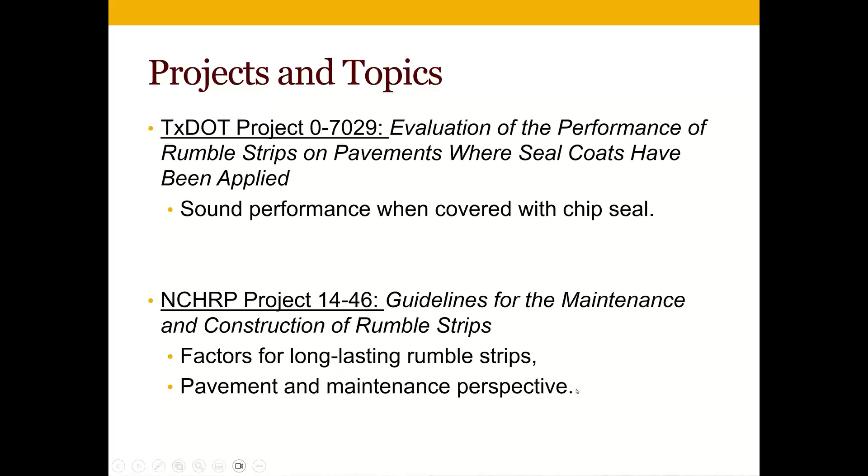I'm also wrapping up just now a project with NCHRP looking at guidelines for the maintenance and construction of rumble strips. In this case, we're looking at how different construction methods and maintenance affects the actual pavement condition where those rumble strips are, and how those rumble strips could be improved to improve durability. Because that project is still wrapping up, I'll only touch just briefly on it at the end here. So most of this will be about the TxDOT project.

So we defined sound performance of the rumble strip in terms of the change in noise when you're driving in the wheel path and then crossing over the rumble strip. In this case, the noise in the wheel path was about 64 decibels. When we went on the center line, that jumped up to 80. So the difference is a change of 16 decibels.

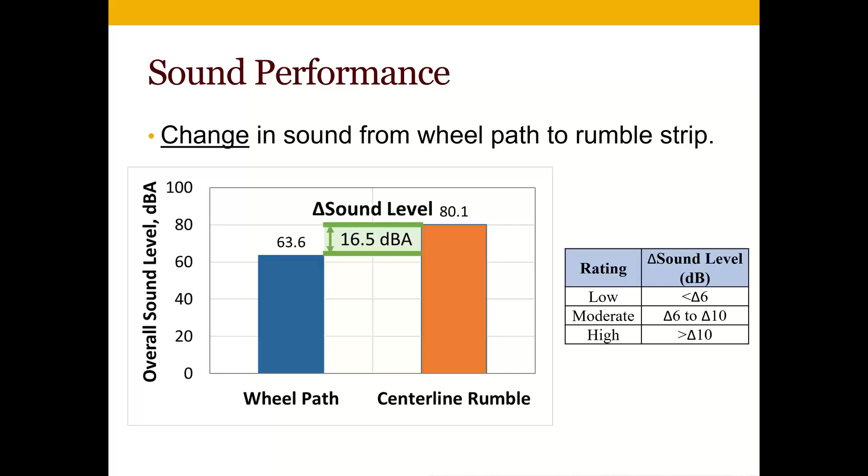When looking at some of the literature for this project, we considered a high-performing rumble strip as being greater than 10 decibel change, moderate being between 6 to 10, and low performance being below 6 decibel change. So the goal of the study was to really determine how many layers of a chip seal can you put down before you consider the rumble strip performance compromised.

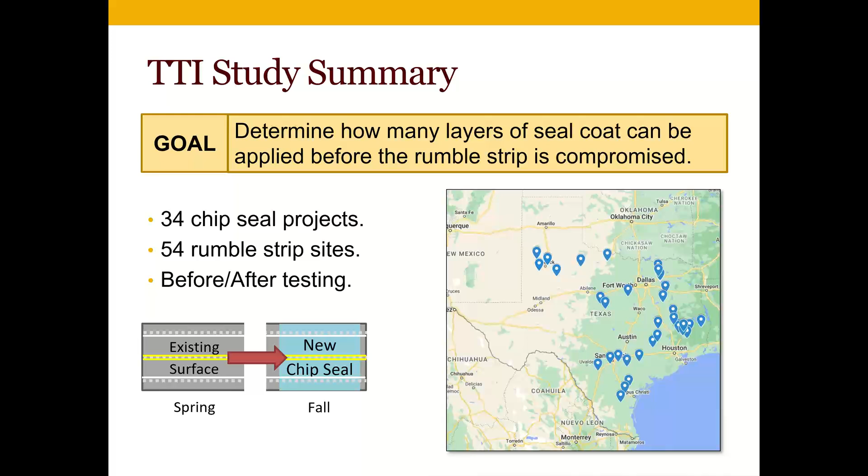So we had 34 chip seal projects around the state, a total of 54 rumble strips that we measured, and we looked at the sound and vibration before and after putting down the chip seal. Inside the vehicle, we had a microphone next to the headrest, and then we put accelerometers under the seat and on the steering wheel. We tested with a pickup truck and a passenger car going at different speeds. I'll just hit on the summary results here, focusing on the sound.

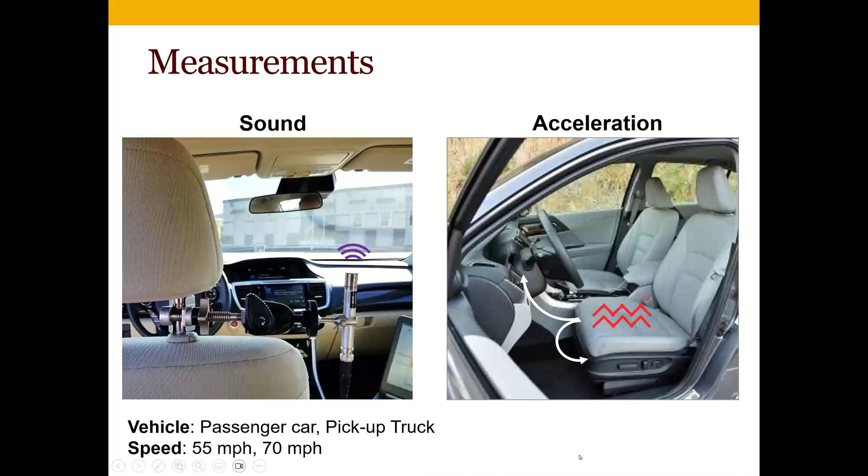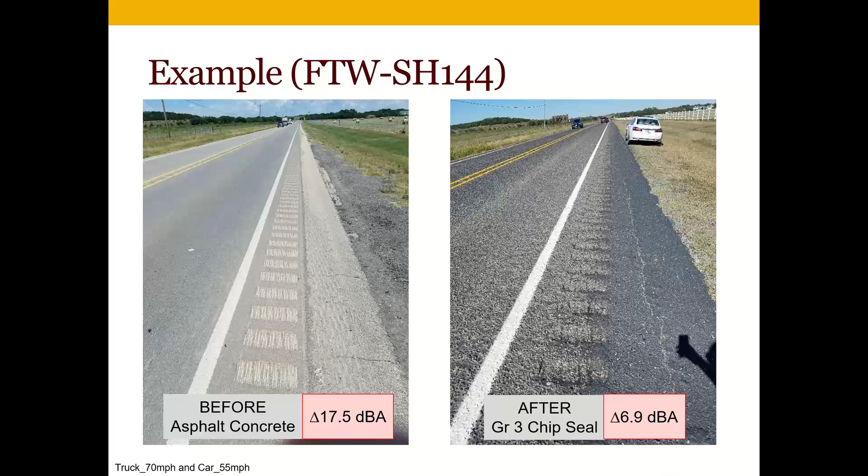So just some pictures here so you have an idea of what's going on. This is an asphalt concrete pavement beforehand, and it had a noise performance of 17 decibel change. After we put down what we call a grade 3 chip seal, that dropped down to 7 decibels. The grade refers to the size of the rock used, with grade 3 being 5/8 inch chip. Here's another example. This had already been covered once, and it had a performance of 6 decibels. You covered it again, and now it drops down to only 4 decibel performance, and basically you can't even see it.

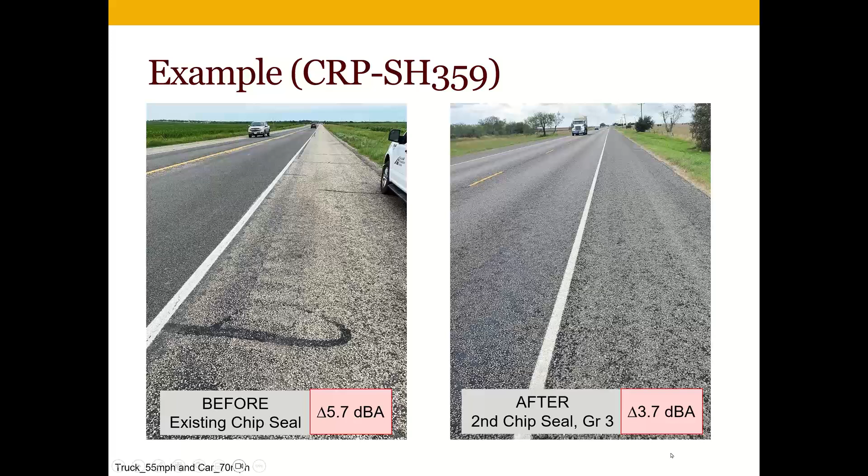So just a high-level view, we found that when it wasn't covered at all, on average we were about 14 decibels performance. That dropped to about 8 decibels after one seal coat or one chip seal, and after 2 and 3, they were basically the same at about 5 decibels. Now, this is the trend overall, but I put this long bar here that has a very wide range. This is actually the range of data that we saw within all the projects that we tested. In some cases, you had a rumble strip that was newly installed, but was almost on the verge of not performing well enough, whereas some of these, even after two chip seals, were still performing pretty well.

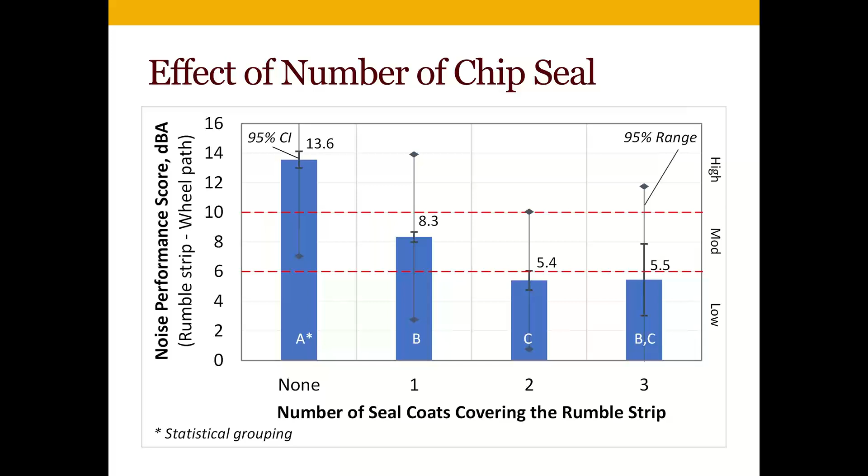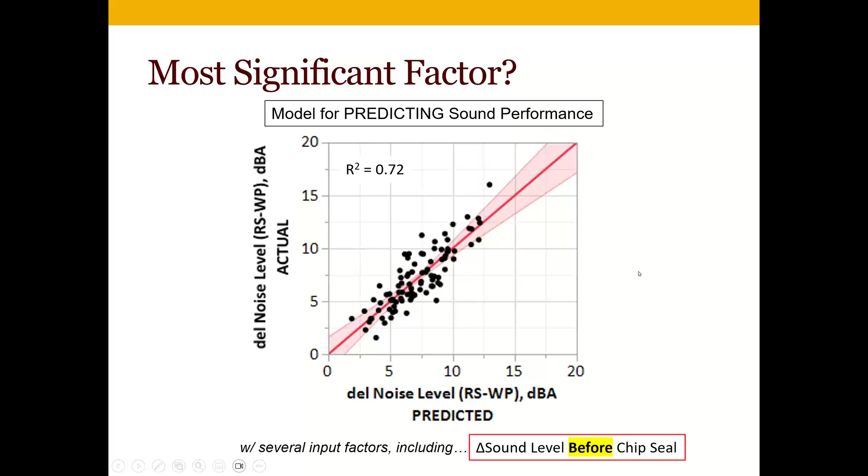But we looked at some other models, assuming you can't get the sound beforehand. So we have 3 models. The first, again, you measure the sound and you also measure the rumble strip depth. You have a pretty good prediction. If you don't have the sound and all you know is the rumble strip depth, you have a moderate accuracy prediction, about 0.5. And if you don't know anything about your rumble strip, you just know that it's there and that you're going to put a chip seal on top of it, you really don't have a lot of accuracy to know what the result will be. R squared is 0.3.

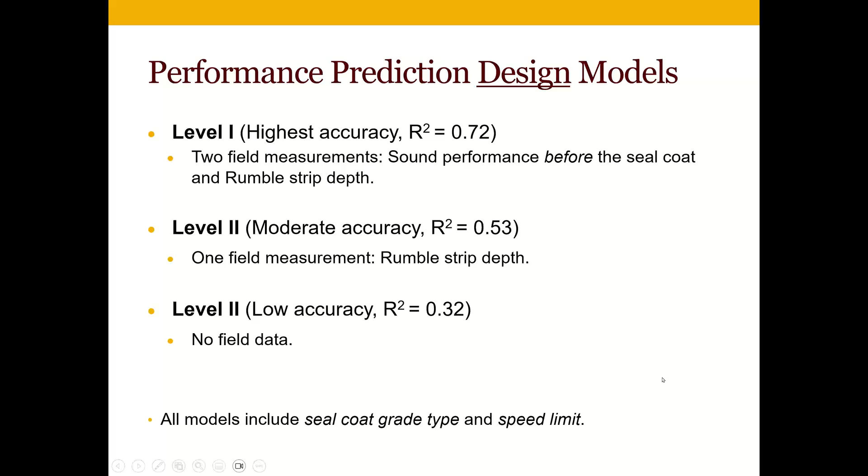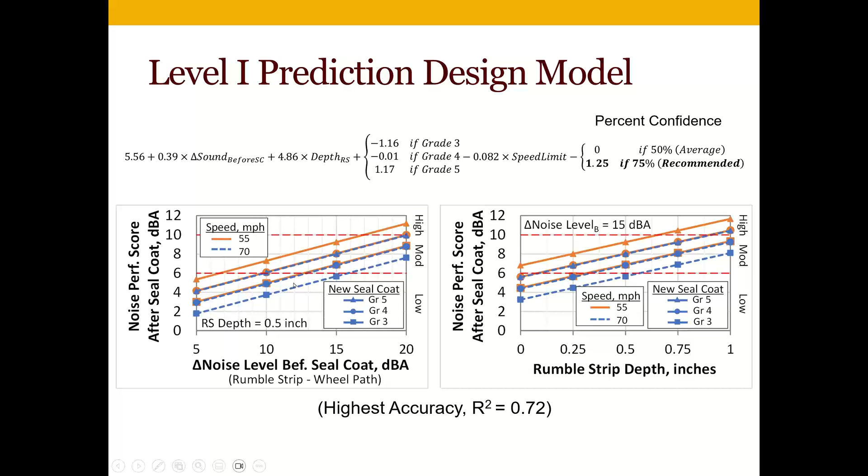But we did make these models, and so depending on what information they have, somebody could run this little equation here, or they could look at these graphs and predict, if I'm going in with 10 decibels, what do I think I'll get afterwards if I put down a grade 4 chip seal, for example. But the high-level takeaways, these are just rules of thumb that we can extract from these models. The first is, it's okay to use a chip seal over an uncovered rumble strip if you're using what we call a grade 4 or a grade 5. So that's a half-inch chip or less. If that's what you're putting down, you can put down 1 chip seal and you should be fine.

If you're putting down a larger chip size, then you've got to do a little more digging to see if your rumble strip is compromised. Also, if you have really good sound performance beforehand, greater than 15 decibels, and you have a typical rumble strip that's a half-inch deep, you should be fine. You can seal it.

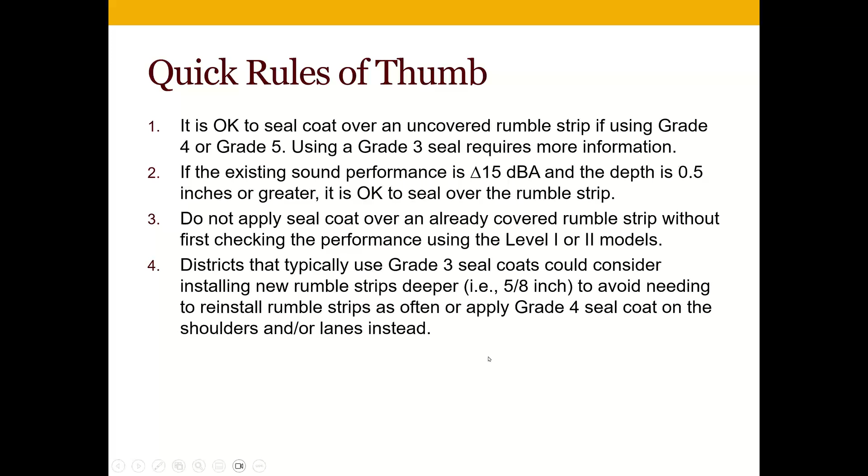We found that if you want to put down a second chip seal and you don't know anything else about it, like the depth of the rumble strip, there's a good chance that you're not going to get the performance you want. You really need a bit of information like the depth or the sound before you put on that second chip seal. We also found that if you're a district in Texas that uses that larger chip seal size, consider installing your rumble strip deeper to avoid needing to reinstall the rumble strip later, or apply a smaller chip seal, a smaller rock size.

I just wanted to touch real briefly on the NCHRP project we're doing that actually finishes this month, so the publication should be coming out soon. This included a survey of 30 states. We did interviews with the industry. Then we went and measured the distress of 110 rumble strips spread across 12 states, looking at pavement type, location of the rumble strips, on the joint, off the joint, what kind of maintenance was done. We looked at rectangular rumble strips and the mumble strip, or a sinusoidal strip, and then we even produced some guidelines for that.

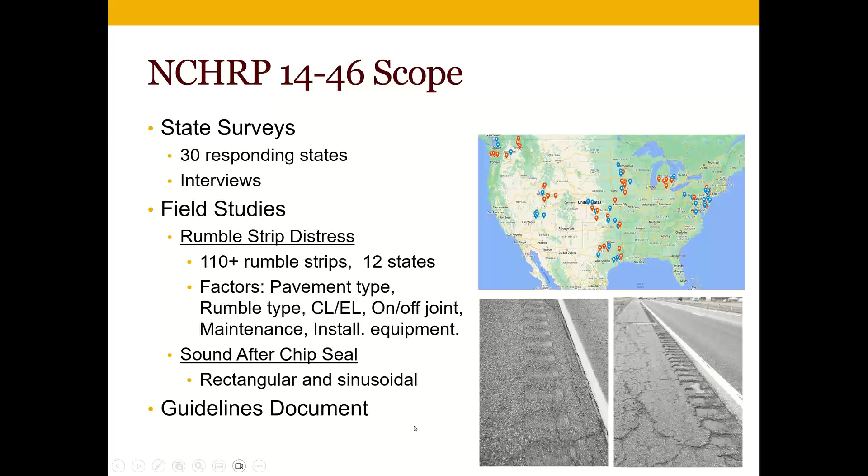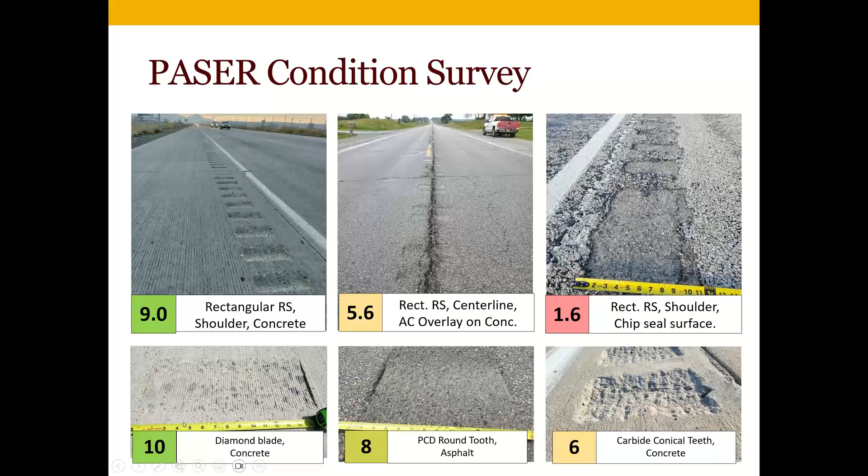I can't really go into the details here, but just high level, here's the kinds of problems that we saw on the road. We gave them a rating of 10 being a perfect rumble strip and a 1 being completely failed. We even looked at different ways of milling that in. I won't go through and read all this, but we did find some things about which pavement types were better. Chip seals tended to have a big issue if you mill into a chip seal. The pavement age really affects how well your rumble strip's going to last. If you mill into an old pavement, that's going to affect it. Longitudinal joint construction is important, as we'll hear later on. And then we found too, you can install with different types of milling heads, and you can change the quality of the cut, but that doesn't really affect your overall rumble strip life.

So like I said, that whole study is ending this month, and we'll have the results for that soon. So thank you everyone for your time, and I look forward to the panel discussion.

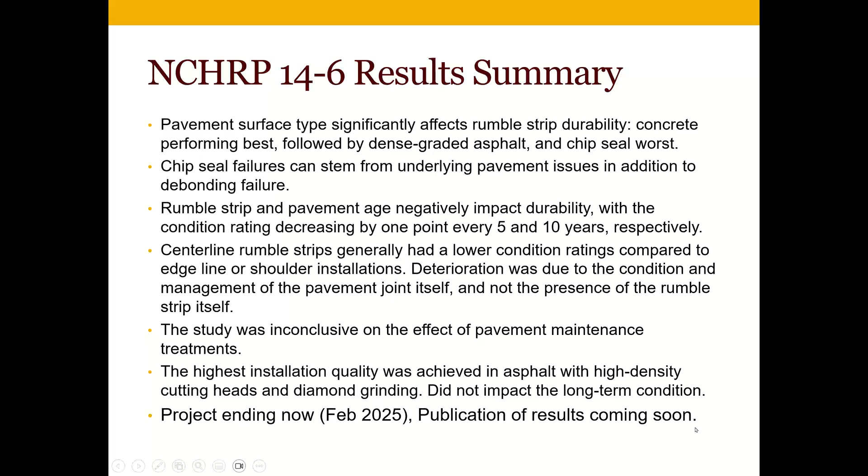Our next speaker, as I slowly transition out of this, is Dan. Dan comes to us, he's done quite a few presentations for us in NRRA, the National Road Research Alliance, where MoDOT has been participating in several studies with them. So Dan comes to us, let's go substantially north, and join my friend up north to discuss our next step as we delve deeper into the practical applications, still high level right now, of these particular mumble and rumble treatments. Dan?

Sure. We're not quite there yet. I'm not seeing the share panel unless Rob hasn't shared it with me. I see you right now. You can see me. I can't. What I'm saying is I don't have the take control panel available. That's okay. Todd, help me out. Oh, shoot. I tell you, we practiced this, everyone, and it went smooth as silk. But unlike when you take your car to the mechanic, it doesn't seem to want to make that noise, does it? Okay, Dan, you're ready. Now you're muted.

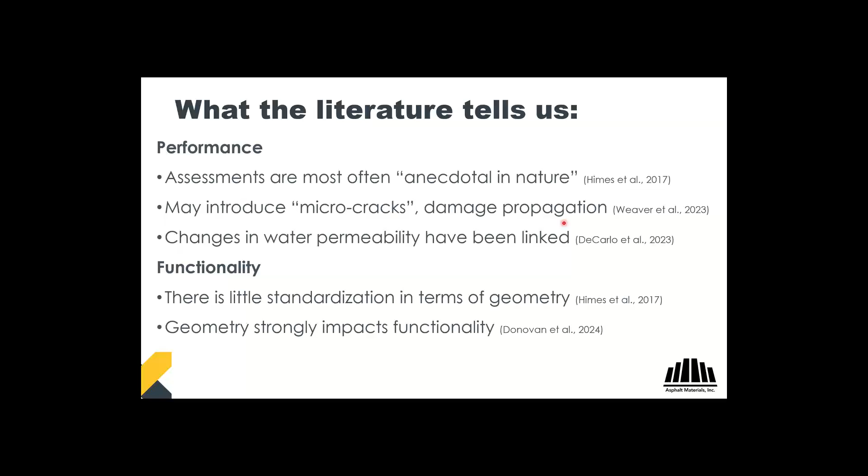could be annoying your residents and generating phone calls to the agency and complaints and so forth. So we wanted to look at that as well. To that end, it brings us nicely to this ongoing NRRA study, and the title of the study is there, and we'll put a link later on. But really what this is, is an effort to gain field data, field projects, as controlled of a study as possible, and asking these three questions.

Does milling of rumble strips damage our pavements or produce the conditions that facilitate damage, you might say? And can that be offset with material treatments? And Bryan's the perfect setup man here, because we also wanted to say, well, we can't be blind to the fact that these material treatments, if they affect the functionality, may not be the right choice. So we wanted to make sure that they did not impact functionality as a safety tool.

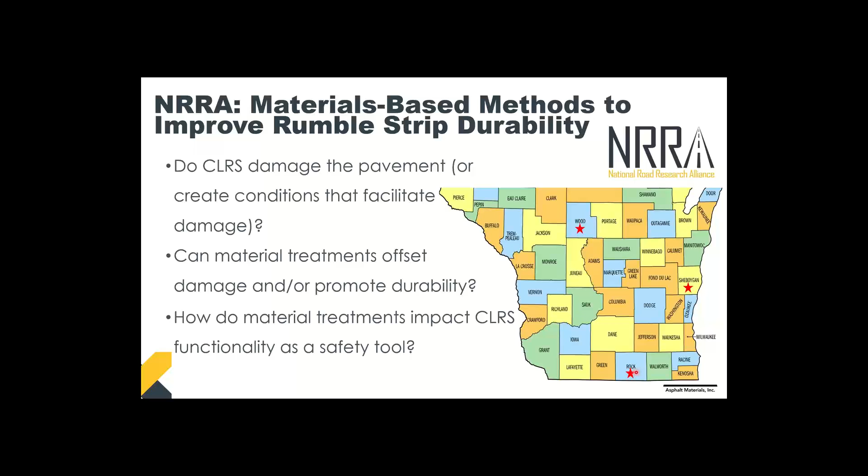2 of these are in carbonate stone areas, so limestone based mix designs. One of them is in a silica based, a granite mix design. 2 of them got standard Wisconsin DOT corrugations, which for us means paired rectangular, half barrel, half circle corrugations that are paired down the center line. And then the 3rd project got sinusoidal or mumble strips to the WisDOT spec. For us, that's a 1/2 inch max mill depth, just scouring the surface at the high points, and then a 14-inch wavelength for our sinusoids. But that's all information that's easy to look up. I like pictures.

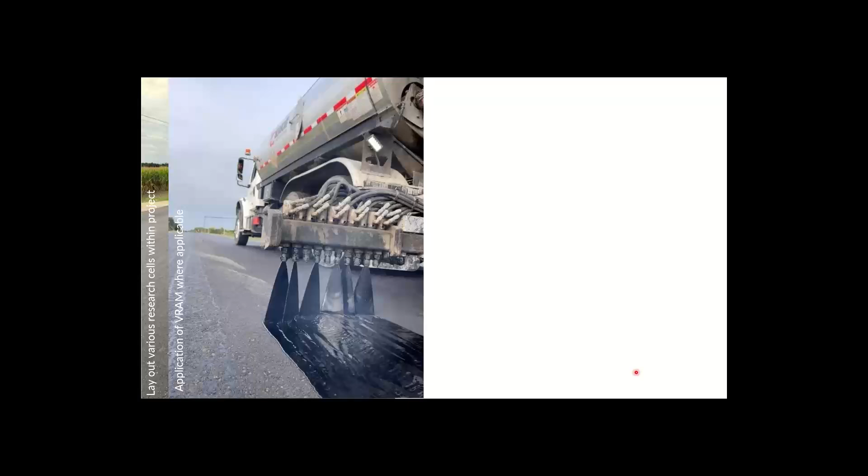I'm a construction guy, so how these projects were built, you're looking at a base layer, as we would call it in Wisconsin, or a lower layer being marked out for the sections. We tried to get sections that were at least a 1/2 mile long to be representative of paving variability, base changes, things like that. Mark them out within the project. For those of you familiar with void reducing membrane, that goes down on the base layer before you pave the surface layer. Here's a picture of application of VRAM in one of those sections.

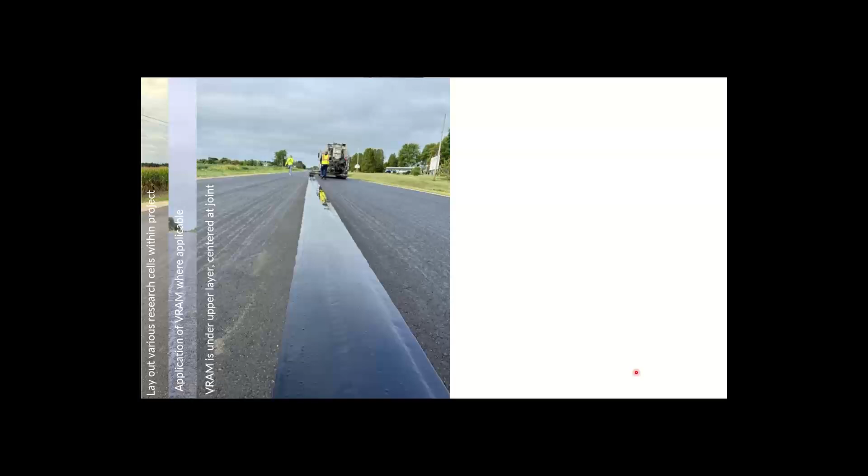Another picture, VRAM is centered at the joint. So you could think of it as like putting a piece of double-sided tape down. You're going to pave on half of it first, and then your second pass is going to hit the other half. So here's paving the upper layer on the VRAM section.

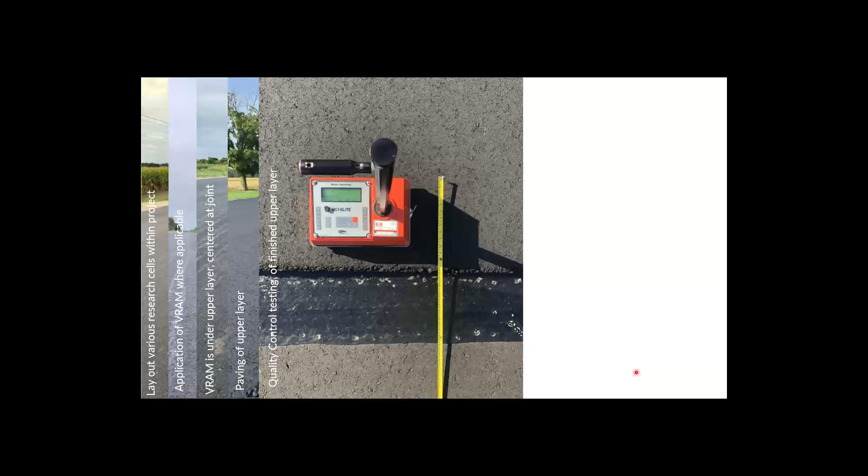We asked the counties, in this instance, these are county highway agencies, follow your standard construction practice. Act as if we're not there and we're just going to put these treatments on, mill the rumble strips, and measure. So in this instance, quality control testing via nuke density of the joint layer to collect that information. We want to make sure these treatments don't affect the ability to build a good joint, and we'll get to that as well. Milling of the rumble strips, this is something that most of us are familiar with.

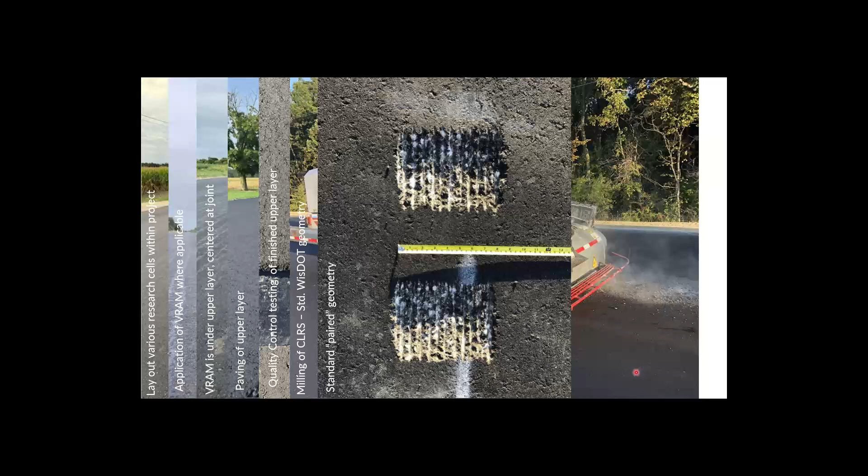So this is WISDOT standard corrugations. So these would be paired. In other words, I consider this one pair, 18 inches offset from these would be another pair, and so on and so forth. So you kind of hit these things and it's like, zzz, zzz, zzz, as you go down the road. So this is standard geometry. Of course, we had one project that did the mumble strips, as they're called, or sinusoidal, which is a fun word to say, and I prefer that. So this is sinusoidal geometry, what it looks like immediately after sweeping and ready for striping.

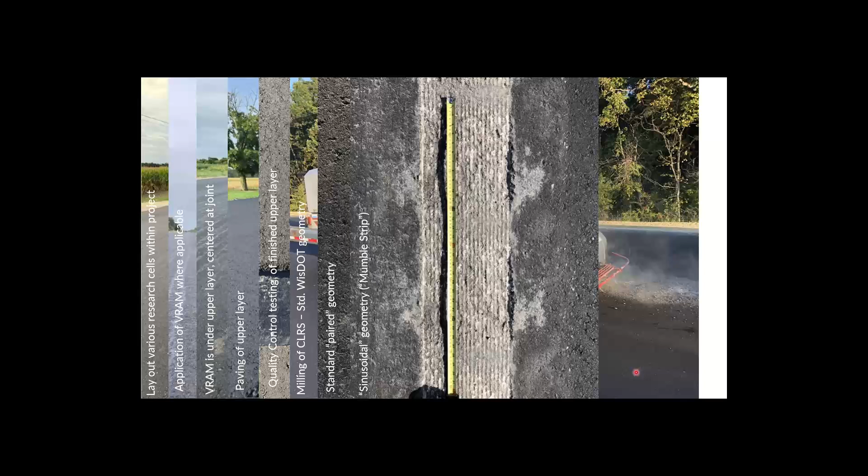So the first material treatment, VRAM, that goes underneath the joint. We would call that a pre-construction treatment. And then we did a post-construction treatment. In this instance, we did a penetrating asphalt emulsion fog seal. Nancy will touch on another type of surface treatment, but suffice to say these are focused on the centerline joint to provide some sort of residue, be it in this instance asphalt, it could be like a rejuvenating oil, any number of things to the surface at this weak point of our pavement construction.

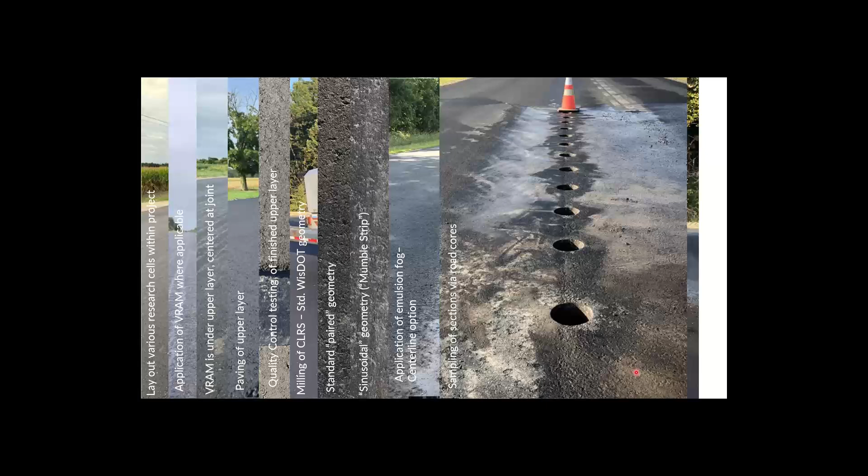We wanted this to be true to form. This is a field study, takes into account all the different things that can happen with field construction. So we went out and we cored these. We gathered enough cores that we could fulfill our suite of testing, which we'll show you. And then, of course, we wanted the sections to be long enough, not just for variability, but we wanted to measure noise. And Bryan touched on this. We did internal noise and external fugitive noise and vibration.

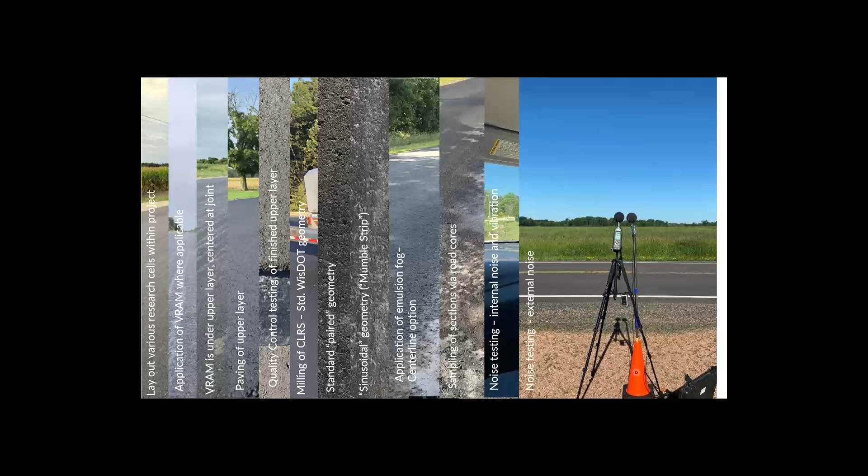This is just how we set up for our noise testing following NCHRP guidance from the study that came out. I believe the report is 1102 this last summer. This is how internal noise is measured. This is how external noise is measured. And then the gentleman, we'd clear the road, close it off, drive down that center line, and you can see the technician on the sideline here taking that measurement. You make 3 passes, it's averaged, sent through sort of a filtering algorithm, and that's your result.

Take the cores back to the lab. We wanted to make some baseline assumptions. You know, the centerline joint's not expected to carry significant load other than incidental crossover traffic. So sort of thermal movements and any sort of fatigue type movements are key. Of course, water infiltration at the joint has long been known to deteriorate longitudinal joints quickly. So we measured things like permeability, and then our standard volumetrics. So every core that we got was put through some subset of this testing, really as an investigative mission.

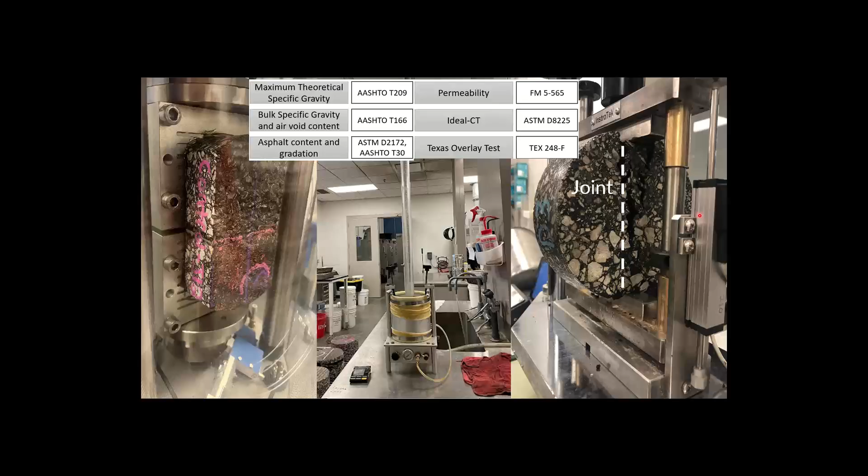What is happening when we mill these rumble strips? Can it be measured? And if we jump right into it, what we're learning is actually challenging some of our beliefs. And what we observed, to get right to it, is the milling of the rumble strips did slightly increase air voids on average, consistent over the projects. But we did not observe a statistically significant change in aggregate gradation on the cores, which meant that there was, I don't want to say no, there was less impact of degradation from the milling. So although we can see the aggregates get a little chewed up, it didn't affect it on a bulk sense.

And evidently, the voids that were created were not interconnected, because what we found is that the rumble strips did not significantly increase permeability after they were installed. So something we'll speak to later is these projects were constructed in the joint cores with no treatment, no rumble strips, would have been considered impermeable anyway, and the rumble strips didn't change that. So kind of good in, good out, right?

We don't have a case where it was a poorly constructed joint and you milled rumble strips. Perhaps Bryan's NCHRP study will shed some light on that. I did forget to add, and I'll add it here. In Wisconsin, we use mostly dense graded mixtures for this type of application, and we are a fine graded state. Because of our aggregate resources, we tend to design our mixes fairly fine.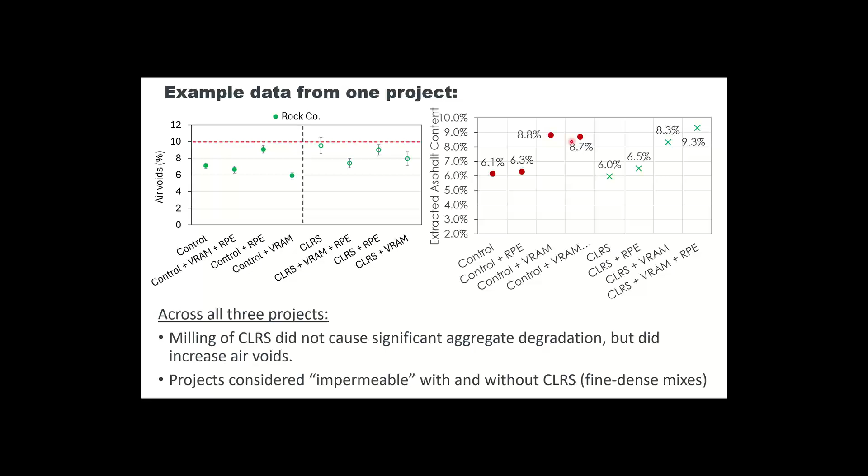And of course, changes in asphalt content are more readily apparent for the VRAM material because of the amount that you're putting down. VRAM is put down at a comparatively high rate relative to the fog seal, especially, and that's easily detectable in these lab tests, and it'll come into play later as well. When we looked at cracking behavior, and there's much more to it than this, I chose one slide from one project on one test.

One of the parameters you measure is the so-called crack progression rate. That's relatively speaking, how quickly that crack grows through this sample, whether it starts at the top or bottom is irrelevant, just how quickly it grows. So it's like damage progression, if you want to think about it that way. And what we found is milling of the rumble strips, from a statistical point of view, significantly increased this rate. This is a non-load related type test. It's a fatigue type test.

So what that means is, we looked at the literature and we said, well, if researchers are telling us that the milling might introduce stress concentrations or these micro cracks, micro damage as we might call it, that actually does have an effect on load cycles, in this case for fatigue, right? It promotes that crack growth at a higher rate. So it sort of validates what other researchers have found in a direct way with these lab samples. And this was repeated over the three projects, both aggregate types and both types of rumble strip geometries. So it's a consistent trend that we're seeing, at least for these projects.

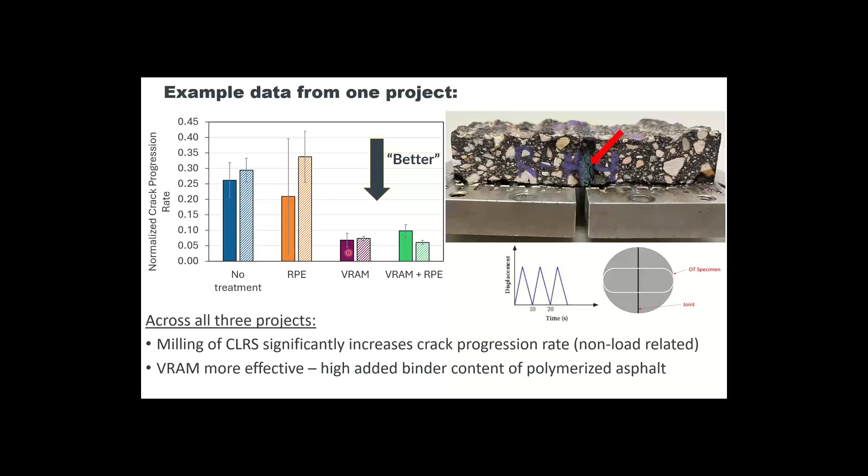And I'll be careful to add, that doesn't mean that the fog type treatment can't be effective at helping prolong the life of a rumble strip. It might just have a different mechanism, right? Maybe it's a water sealing effect or so forth, if we believe stripping or moisture induced damage is a large contributor.

And what we learned is that these treatments actually do not impede the rumble strip's ability to be a rumble strip, right? We maintain that driver safety over the three projects, over any of the treatment combinations. So this is two different types of rumble strips, three different mix designs, and three treatment scenarios: VRAM, fog, or fog plus VRAM in this instance. So that's a good thing.

Importantly, these are brand new pavements. So dense fine graded mixtures tend to have relatively low off rumble strip noise. Something Bryan touched on is chip seals increase the ambient noise anyway, right? So rumble strips aside, just driving on a chip seal is louder. So your on-off interval is actually affected by that as well. Age of the pavement also matters. So we know pavements typically increase about 1 decibel per year of aging, right? So that's not to say rumble strips might change, but if the baseline is changing and getting higher, you would expect the ratio to actually go down. So I want to be careful to say this is on new pavement. Older pavement might show something different, but we don't think that the effect of the treatment would be that detrimental even then.

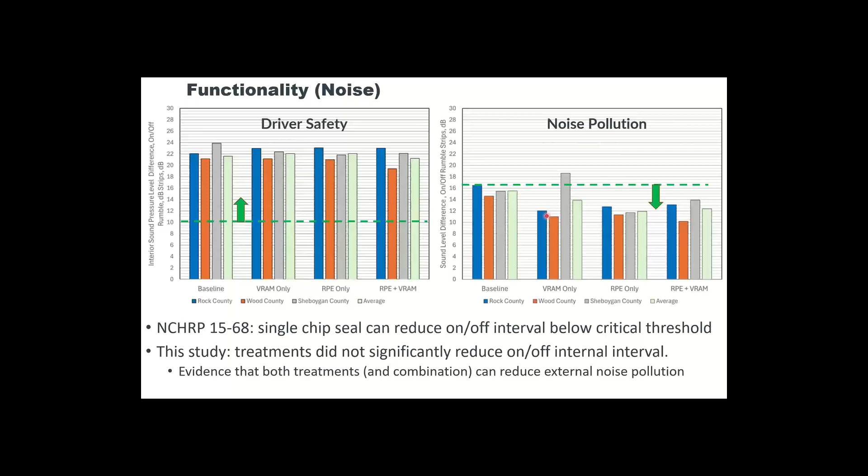By the way, for this particular noise study, a change of 2 decibels is considered to be within about the cloud of data, within the variability of our ability to measure it. So in this instance, let's say from just over 16 decibels down to about 12, that would be considered statistically significant. You would be able to perceive that.

So we had to present a summary, again, ongoing, but to remain faithful to our charge here. I'll say this: rumble strips don't appear to be the boogeyman that perhaps they're sometimes made out to be. They're not the death sentence to the longitudinal joint. But when we found, let's not talk about treatments, let's just talk about construction. Constructing a high quality joint is absolutely paramount, right? Good in is good out. So you build a good joint, rumble strips probably aren't going to be a huge problem for you.

That's not to say, though, that these treatments can't help you. They can increase reliability, because rumble strips do impact these durability parameters, at least to some extent, depending on mix design and project scenario.

So we found material treatments can offset any sort of damage that's caused. They can improve the durability at the joint and increase reliability, but it depends on the mode of failure you're looking for. So we found the treatment that had the highest impact, the most asphalt, highly polymerized, kind of transition that mechanistic response, had the greatest effect. Probably not that surprising.

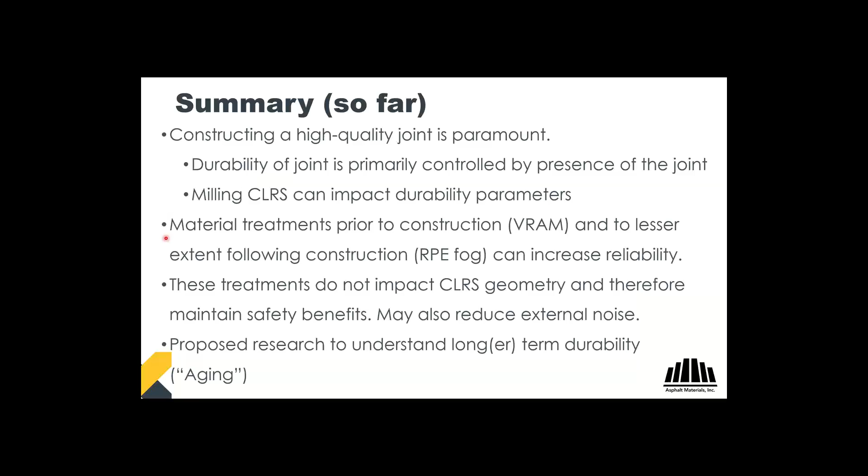Unfortunately, in the context of durability for pavements anyway, we need time and age. These cores were taken the year of construction. Now, the pavements still sit out there. They've been down there for several years now, and we can revisit. That's the next steps here: things like moisture-induced damage and freeze-thaw effects. We need time. We can't simulate that great in the lab, so we're going to have to revisit. So these are very preliminary but positive results.

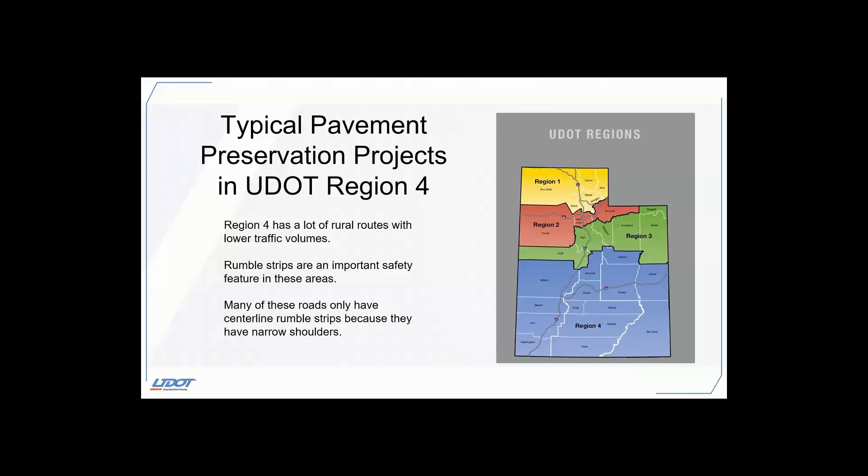Like I mentioned, I'm Region 4's pavement management engineer, and that's roughly the south half of the state. We have a lot of rural routes with lower traffic volumes. So rumble strips are an important safety feature on these routes. And a lot of them, because of the narrowness of the roads, all we have are the centerline rumble strips and nothing on the shoulders. For our typical preservation projects, they fall under either chip seals or microsurfaces. With our chip seals, the rumble strips are usually in the asphalt before we come in with the preservation. If it's new construction, the rumble strips will be installed, and then the chip seal becomes the seal coat for the rumble strips.

And here in Region 4, and I think we do vary a little bit between different regions here in Utah, just because of the huge geographical difference, and we have a lot different traffic patterns in my half of the state than the other regions. But we've allowed the rumble strips to be sealed twice before they're reground. And then the other preservation type project that we do a lot of is microsurfaces. This is typically where we have higher traffic volumes, or the work needs to be completed at night. With these, we've filled the rumble strips with microsurface, and then applied another microsurface coat across the entire roadway. Then the rumble strips are reground, and just the rumble strips are sealed with a flush coat, and typically that's an asphalt polymer treatment that we'll use.

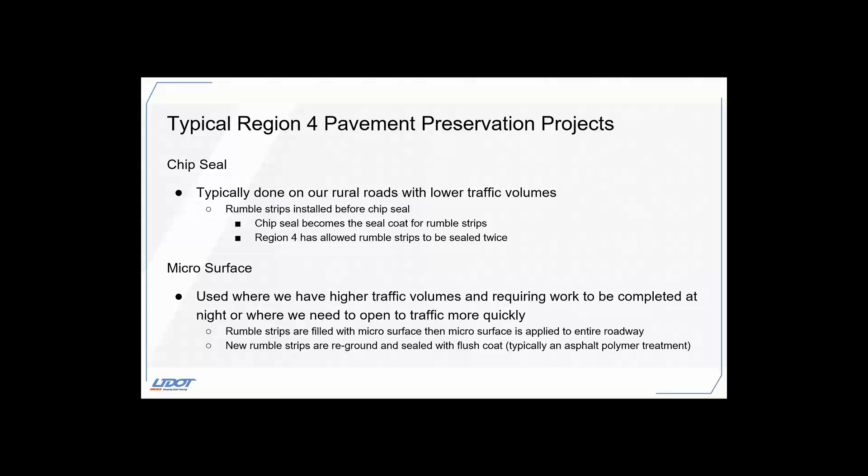I'm kind of glad I have this opportunity today. I wasn't so sure of it when they asked me to do it, but it's given me a chance to do a little bit of a deep dive and see exactly what our specifications and standards say about rumble strips and how we should be treating them.

So I started by looking at our standard drawings, and they spell out the dimensions and spacing of the rumble strips that we have, depending on which routes they're on, whether it's a bicycle route or a divided highway or freeways. And the only thing our standards really say that's relevant to preservation is that all rumble strips on bituminous pavement surfaces need a flush coat. And then it points you to the standard specification.

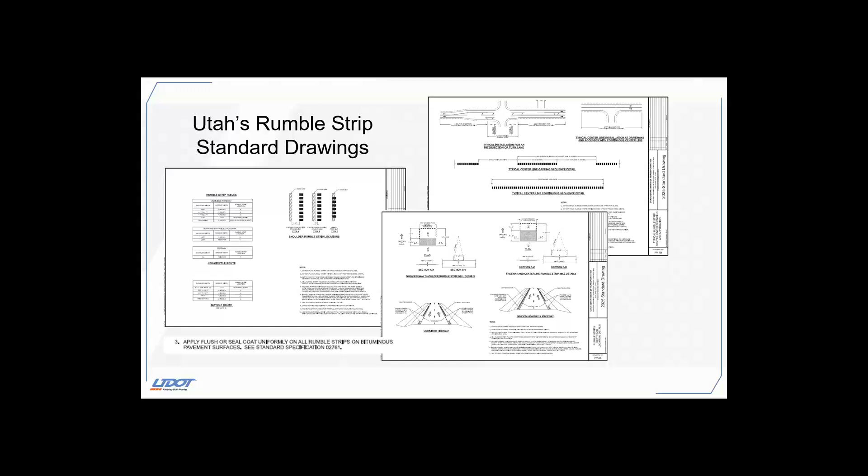So I looked at our specifications and what we spell out, and it's along the same lines. I've highlighted just the preservation related things. Install longitudinal rumble strips after the final wearing course, except when a project includes a chip seal coat as the final wearing course, and the chip seal coat becomes the rumble strip seal at that point. And then apply asphalt flush coat or seal coat on microsurface, HMA or SMA surfaces after the longitudinal rumble strips have been installed in the roadway.

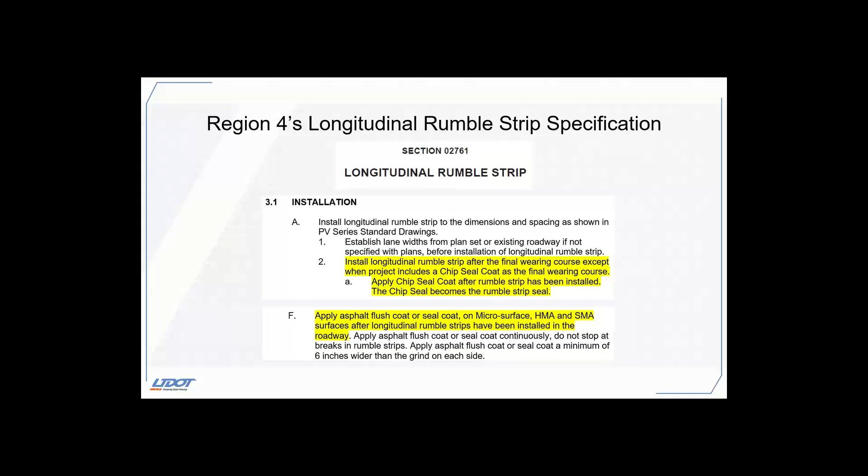So for chip seals, this is what we do probably the majority of in our region here. I've included a couple photos. This is on the same route. There was an SMA surface put down in 2014, and last year half of it was chipped and the rest of it will be chipped this year. And you can see there's a pretty noticeable difference. The photographs are kind of hard to see when you're taking pictures of black asphalt. Like I mentioned, we'll usually seal it twice before we consider the need for regrinding, but obviously we need to evaluate that project by project and make sure that we're confident that they'll function as intended and be acceptable.

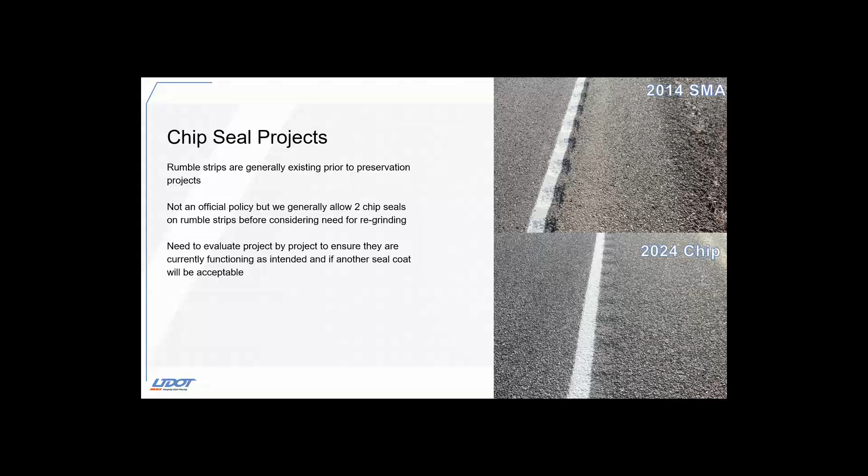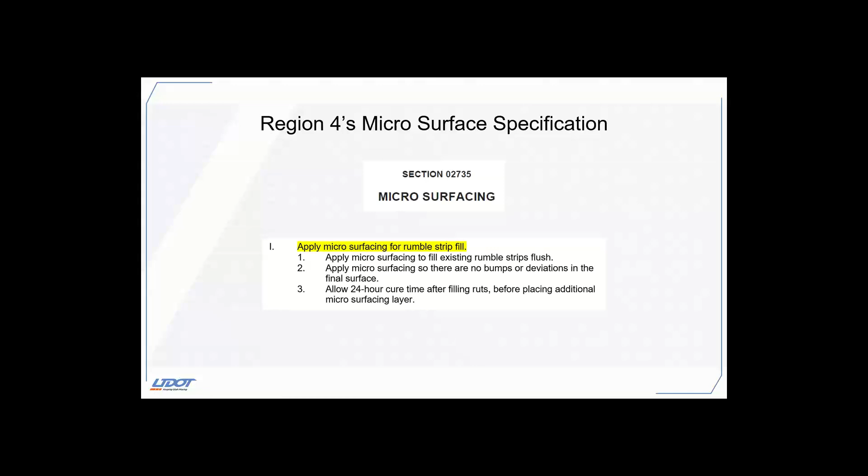So the other one that we do a lot of is microsurfacing, and our microsurface specification, like I mentioned, says to fill the rumble strip prior to applying it across the entire roadway, and then those rumble strips will be reground. And then after they're reground, they're sealed with a flush coat.

In 2023, and this is before I was in this position, so some of this information is secondhand, we tried to do a test project with microsurface and see if we could handle it like we do a chip seal and cover them once and then not have to regrind them. We did a section on I-15 that was about 6 miles or so, and we did a test section on I-70, and these are both divided freeways. The one we did on I-15, I guess they weren't real happy with either one of them after they did it. The one on I-15, they came back the following year and had them reground with an adjacent project. And the one on I-70, they decided that they would leave in place.

And the maintenance foreman down there says they've improved with time, but I don't know if that's truly the case or not, because we don't have a real scientific way of measuring if they actually have improved or not. But some of the factors that we talked about, why they may have worked better on one than the other, like has been mentioned by the other presenters, is just how deep they were before the preservation treatment, how well they were cleaned prior to the microsurface, and what was good and what wasn't was subjective based on how they felt or how they sounded. But as Region 4, that's how we've handled it, and we've decided to continue to fill the rumble strips and then regrind them on a microsurface project in the future.

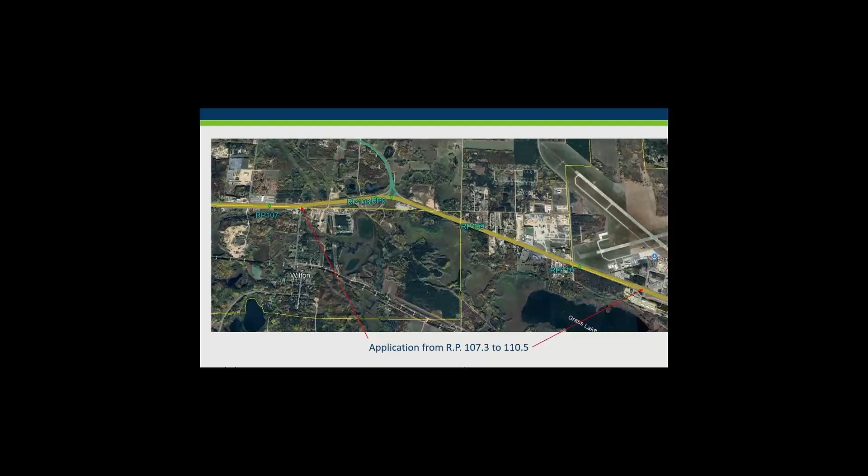I am the District 2 Materials Engineer in northwestern Minnesota. We have been doing a few projects in the last couple of years. First one was on Highway 2. It's a divided highway between the town of Wilton and Bemidji. We did about 3.5 miles of joint bond. This project was paved in 2022. The next season we came in and we put joint bond on the center joint and the right edge line and the rumble strips.

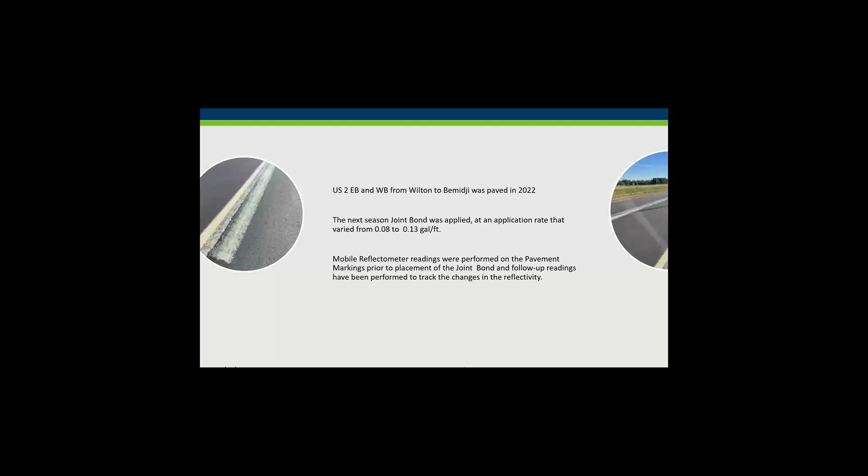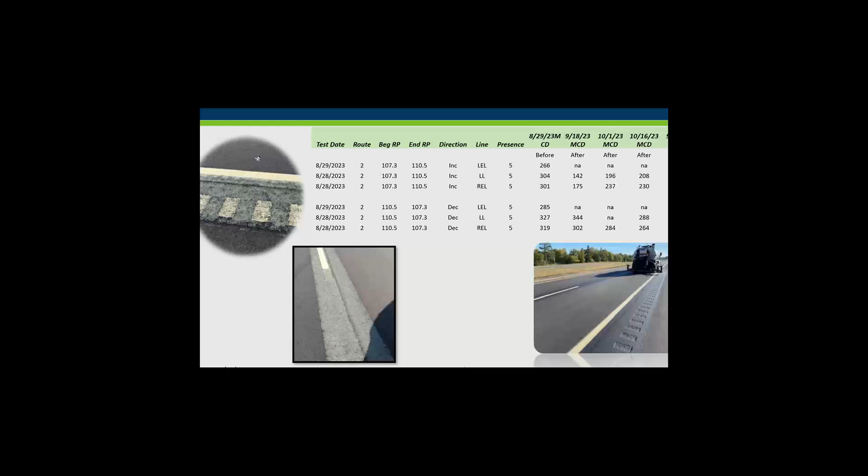Prior to placement, we took mobile reflectometer readings on the pavement markings. Then we did them immediately afterwards, and then another month after that, just to make sure that it didn't have a detrimental effect on the pavement markings. So this is our data here. You can see that we did the left edge lines also. Those are kind of our control readings, but the other pavement markings have degraded to be very close to what our readings are on the treated pavement markings. So they're still within our acceptable limits. We're going to continue to monitor these for a couple more years just to see if the joint bond treatment actually helps the pavement markings maintain their reflectivity or not.

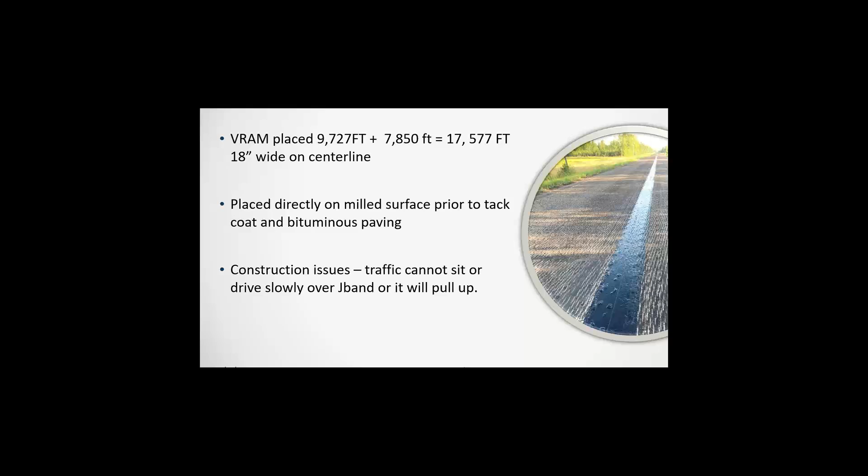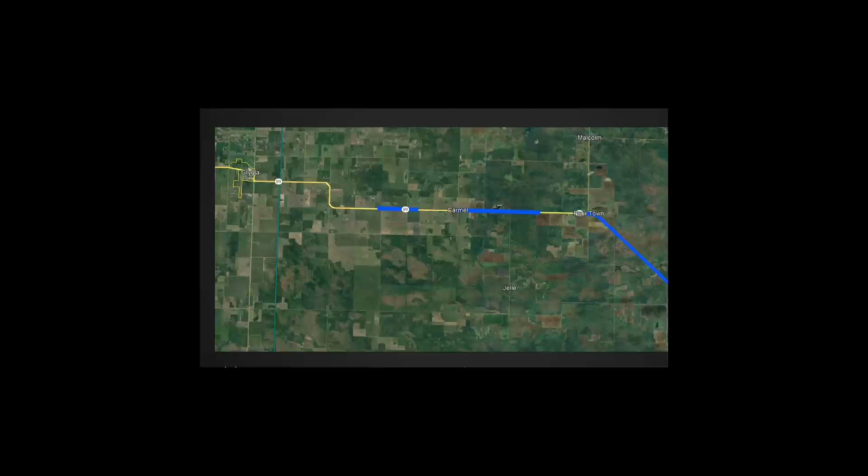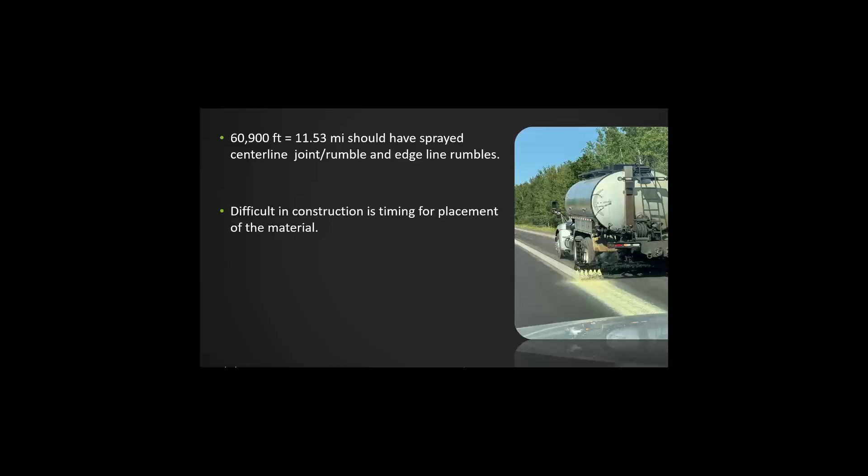Once the final lift was paved, we put joint bond down on these areas shown. The gaps here near Carmel and on the south end of the job are where the VRAM is. We did overlap those ends a little bit so that we can see if the double treatment has a different effect. And then we left this section by Town with no treatment at all. So that's our control section. This one we placed on the centerline joint rumbles. The timing for placement was our difficulty on this one because we wanted to let the joint bond cure as long as we could prior to placement of the pavement markings. We let it sit for an hour or two and then they placed the pavement markings. So we'll be watching to see if the pavement markings adhere well and we don't have to replace them sooner than we had planned.

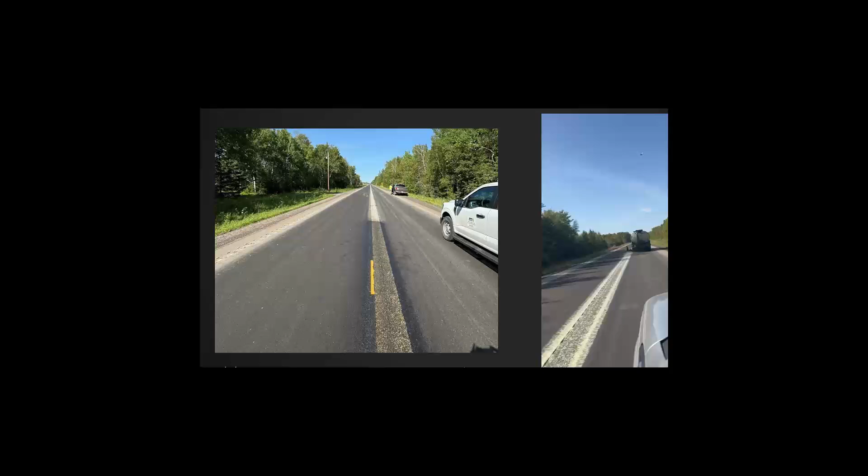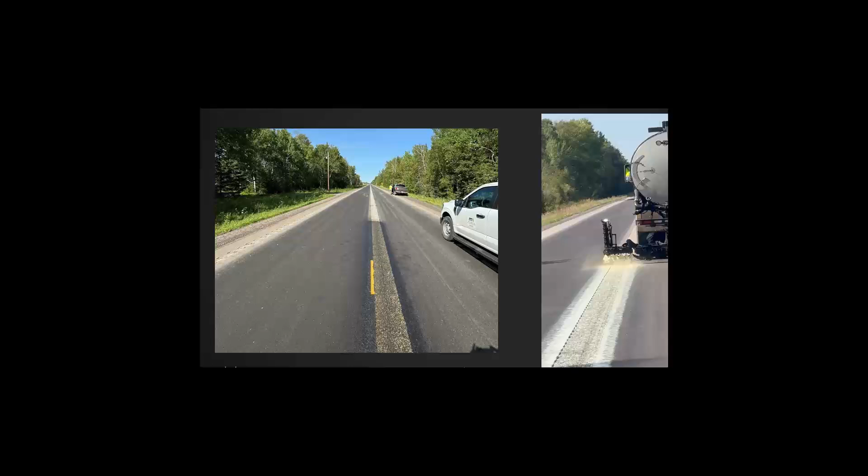This is just the placement and I have a little short video. This is what it looked like. They go fairly quickly when they place the joint bond. And the picture on the left is after it is cured and we're getting ready to put pavement markings down. And that is all I have.